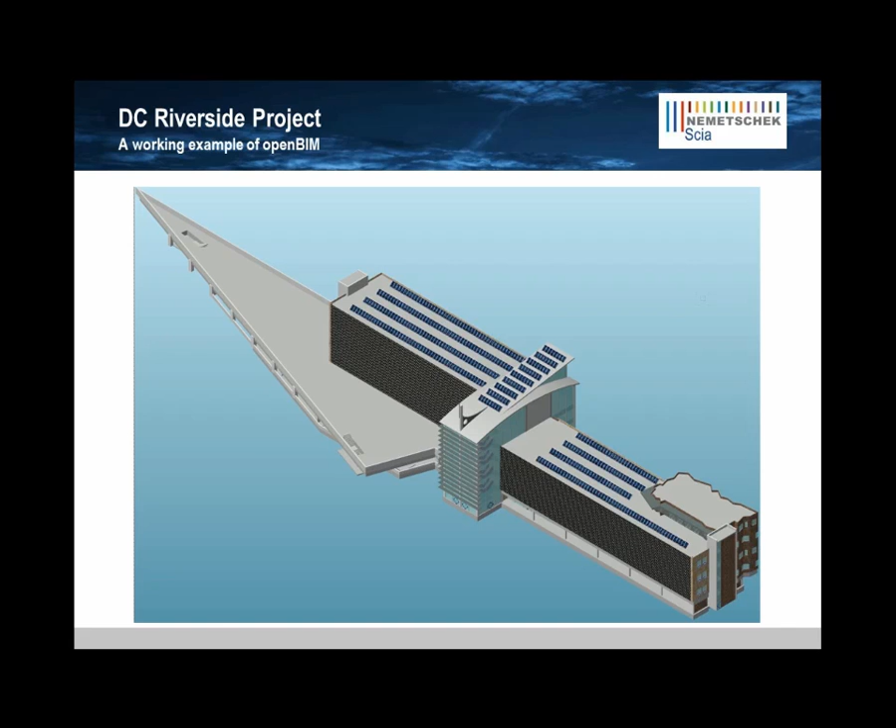As is typical today, the teams in this project all use different BIM authoring tools, i.e., the software that they felt worked best for their part of the design process. To help organize the team, this project used the American Institute of Architects E202-2008 documents and BIM protocol exhibit as a guide to manage the BIM model development and exchange.

Similar BIM protocols are available in other countries, for example, the Statsbygg BIM Guide in Norway and the Senate Properties document in Finland. The benefit of these documents is that they clearly define who's responsible for what at the various stages of the model/project progression.

The AIA BIM documents introduce the concept of model LODs, or levels of development, for each stage in the design process. These stages somewhat overlap the traditional workflows, but instead of 7 or 8 stages with very unique aspects, there are only 5, which focus on the development and the details of the BIM model and the responsibilities of each of the team members.

While the stages appear linear, from general to specific, the BIM Guide really promotes an iterative process where team members are involved early in the design and regularly review and exchange model data. For the purpose of this demonstration, we're going to focus on the LOD 200 and LOD 300 stages of model development.

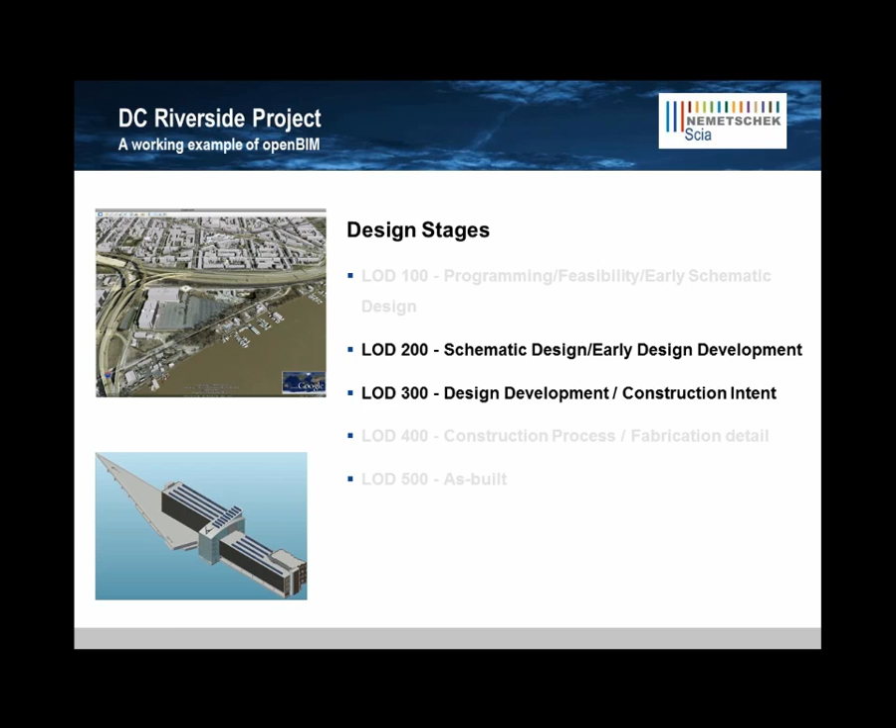This project started with the architect delivering 2 Vectorworks IFC files, an LOD 200 model of the architect's early concept of the architecture, and an LOD 200 model of the architect's early concept of the building structure. Allowing the structural engineer to reference and reuse the architect's model is a huge improvement over today's traditional workflows.

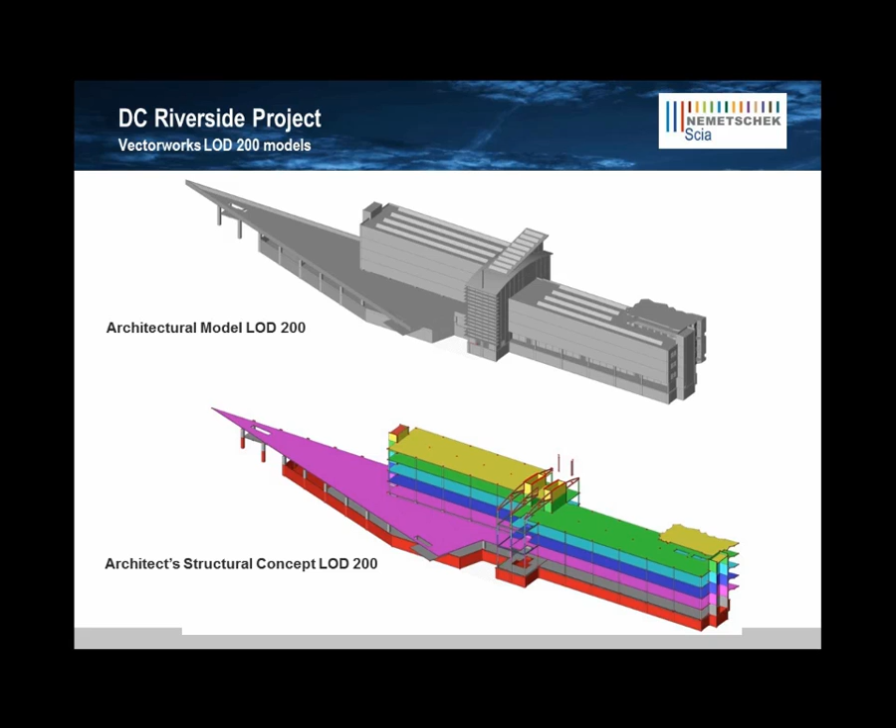Here, you can see the 2 Vectorworks IFC models together in Scia Engineer. Some people ask, why 2 models? Well, having the architect's model as background geometry helps the engineer better understand the architect's intent and reduces the number of RFIs, or requests for information. Having the structural model means that the engineer doesn't have to start from scratch.

Instead of having to import 2D CAD drawings and remodeling the structure as you would in a traditional engineering analysis program, Scia Engineer lets me easily reuse the structural geometry the architect has already created. For example, in this model, floor slabs transfer in as 2D elements and beams and columns as 1D elements. Now, from the architect's model, I can begin to verify and, where necessary, clean up the architect's information.

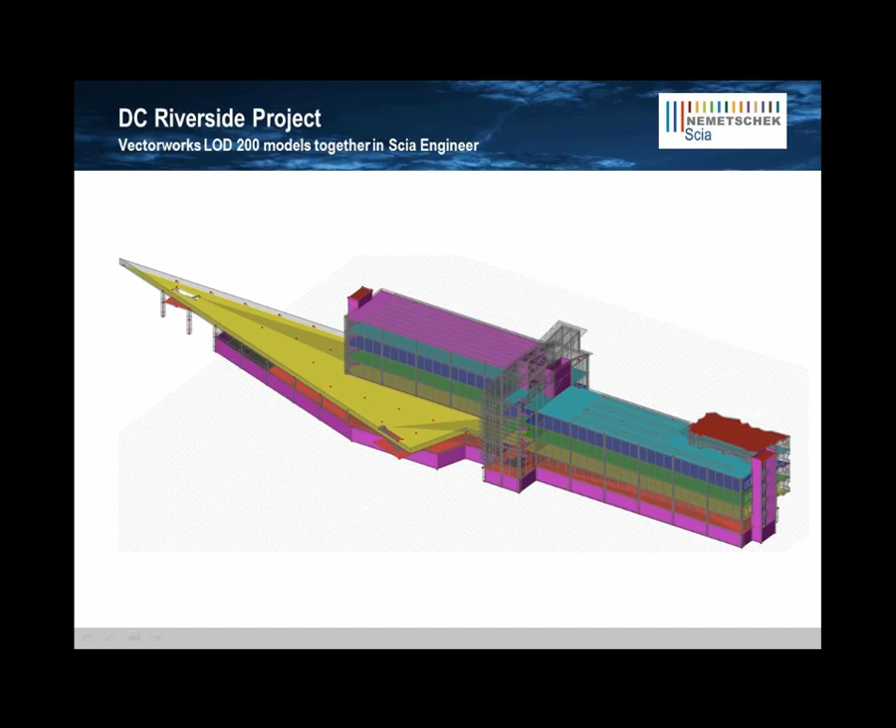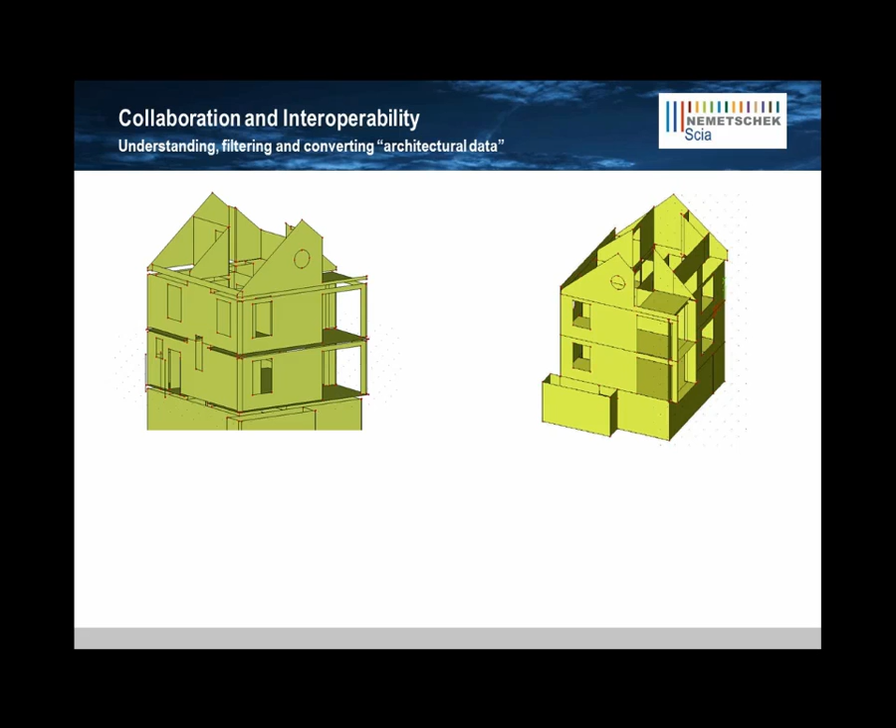This concept of being able to clean up an architect's model is another important technology in Scia Engineer that makes the model exchange between Scia and Vectorworks useful. As you know, architects and engineers think of structures differently. Architects tend to think in volumes and are typically not concerned with modeling the structure as a real coherent structural model that's needed for analysis.

So, how do you go from the architect's model to a proper analytical model? With traditional analysis software, this is either impossible, i.e. I have to remodel the building in my analysis and design software, or the cleanup is very tedious and time-consuming. Scia Engineer provides a suite of tools that make it easy to convert the architect's model into a proper engineering model that's ready for analysis.

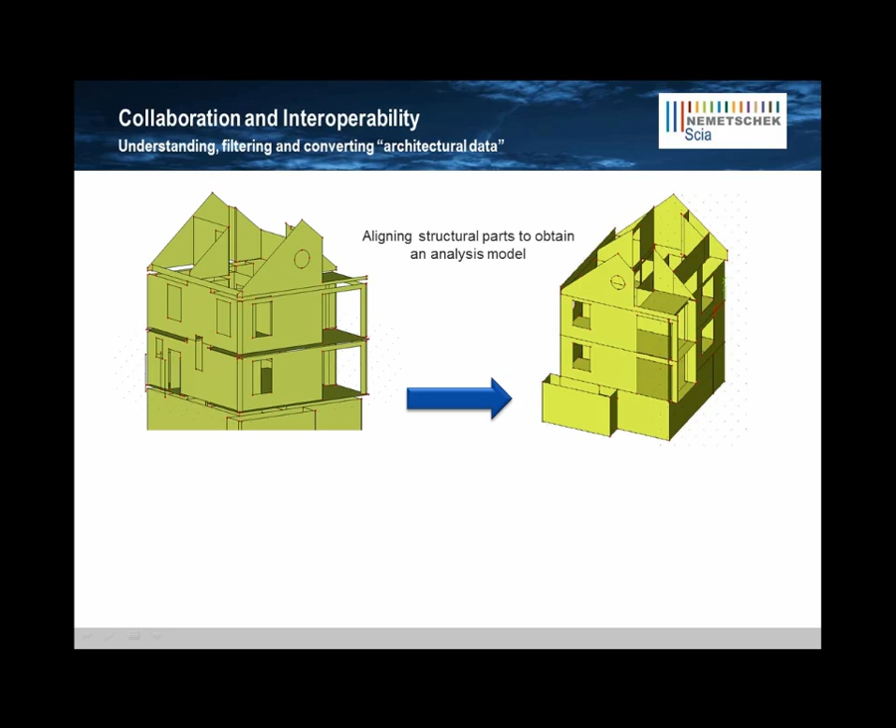Here's a simple example of what I'm talking about. Here, we have a column as it would be designed in Vectorworks Architect. But the engineer needs different information. He needs this schematic representation, the plate, the foundation, the column, the beams, described as bars and nodes. This is classical for an engineer. But how do you go from this to this?

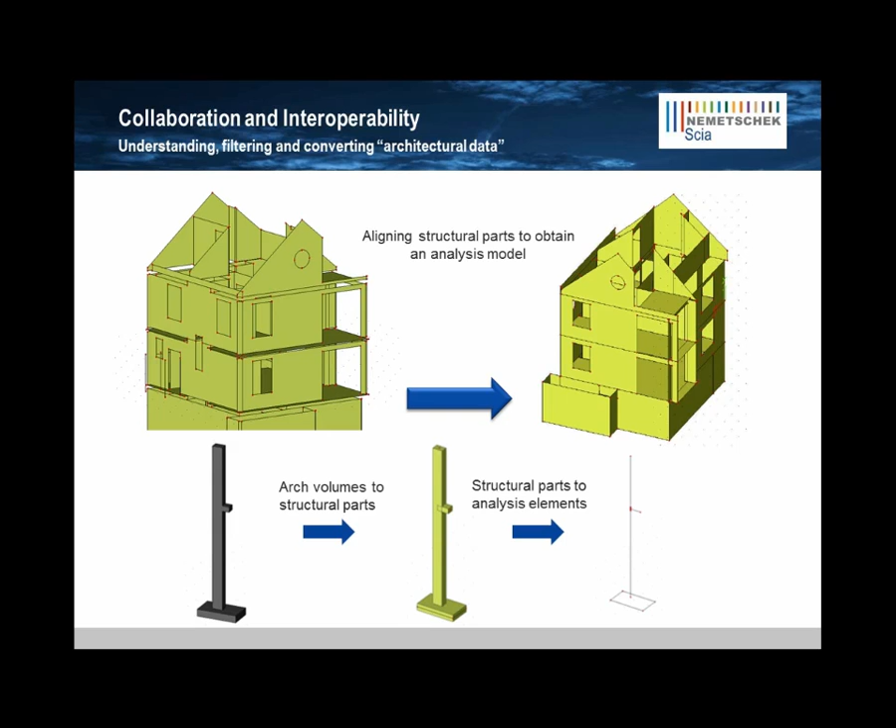So, from the architect's early stage LOD 200 models, the engineer would use rules of thumb and maybe some light analysis to return to the architect an early structural concept model, or what we call the structural LOD 200 model. This model would be returned to the architect for validation before we continue.

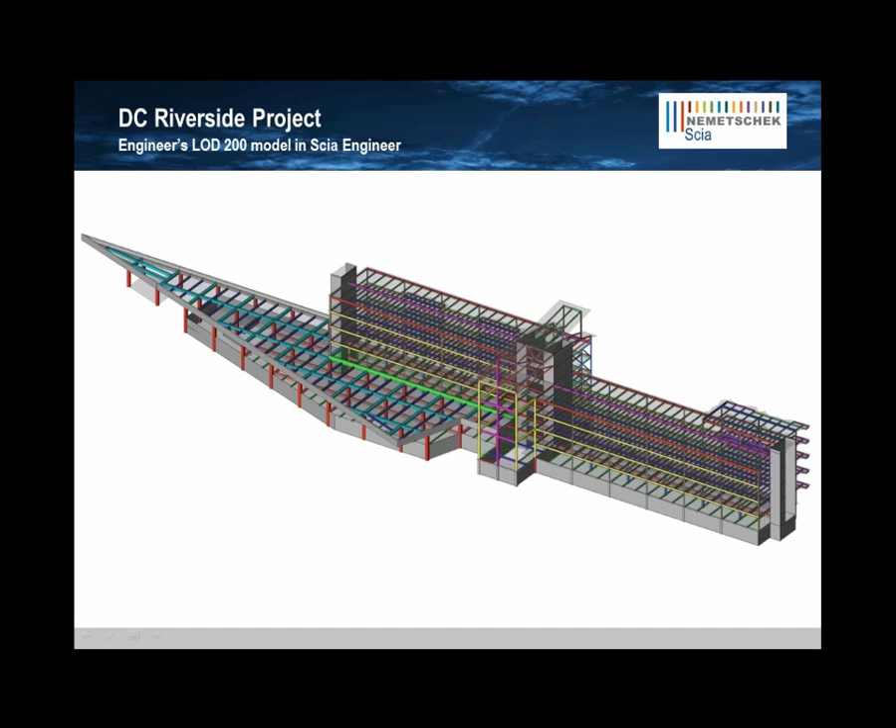In this project, as is typical, the architect, owner, and contractor evaluated the design and decided to make some changes based on cost, constructability, and aesthetics. Here, you can see the more refined Vectorworks Architect LOD 300 model and how it's changed from the LOD 200 model. In this project, the tower roof was simplified to a flat structure, and the east wing penthouse was developed into a full floor to maximize the lettable area.

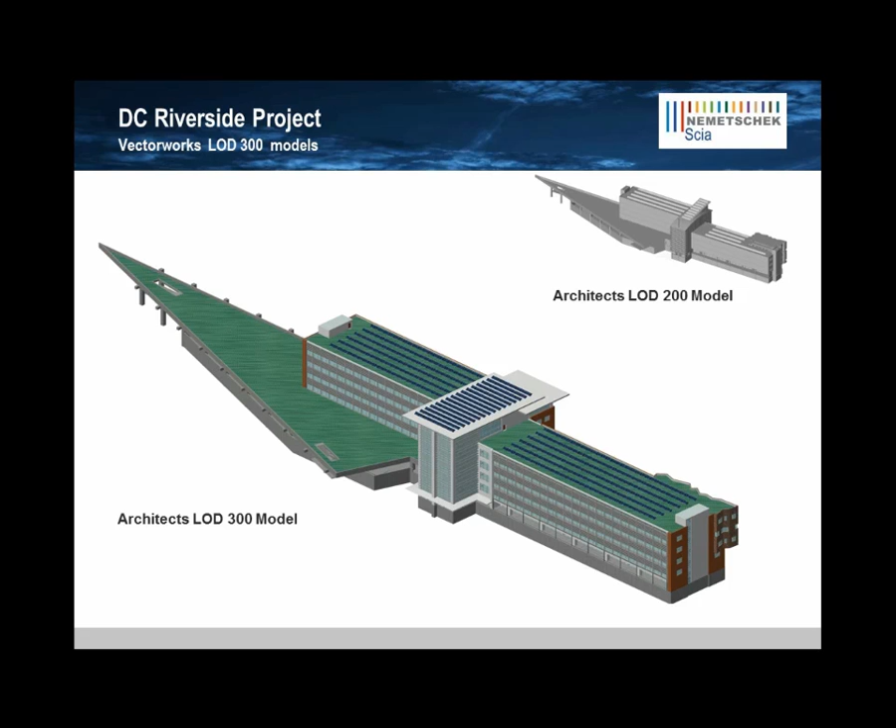So, from the architect's more developed LOD 300 model, we reworked our structural LOD 200 model to incorporate these changes. The result is a more developed LOD 300 model of the structure that's now ready for loading.

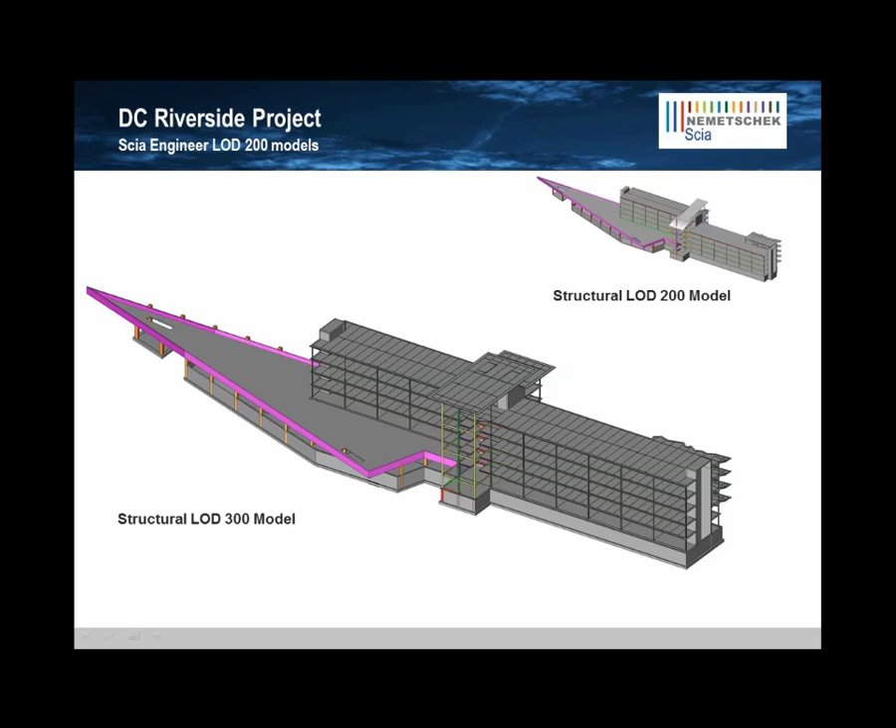Here, you can see the live loads being applied to the floors in SCIA Engineer. Next, we set up the model for wind loads, and we would continue to add loads and load combinations as necessary. Then, with the loads defined, we're ready to move on to analysis and design.

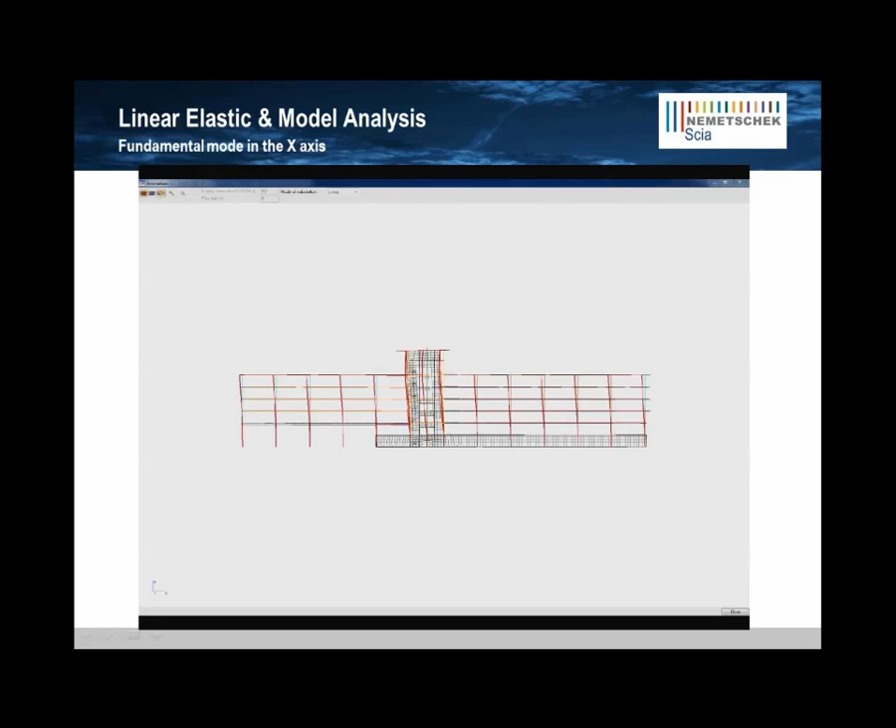Here, we're looking at a fundamental mode in the x-axis. And here, we can visualize the central core deflecting under some seismic excitation.

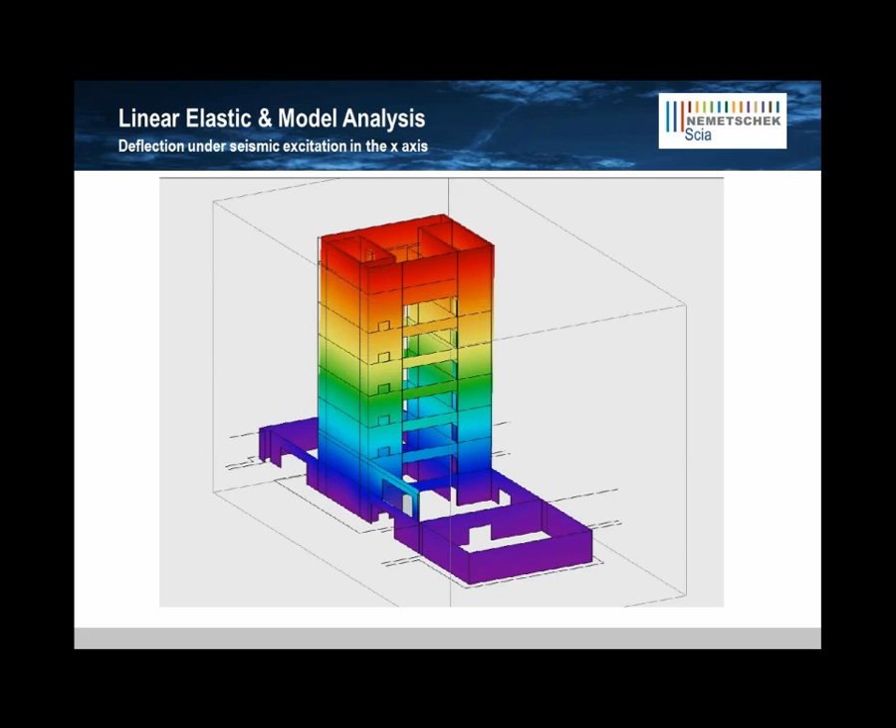The central tower portion of this project required some special attention, as the tower housed the building's mechanical systems and service core, as well as a 6-story open atrium that was an important architectural design element. From the Vectorworks IFC file, we were able to easily derive an accurate analytical model, make refinements, and then pass back to the architect an updated model of the tower structure.

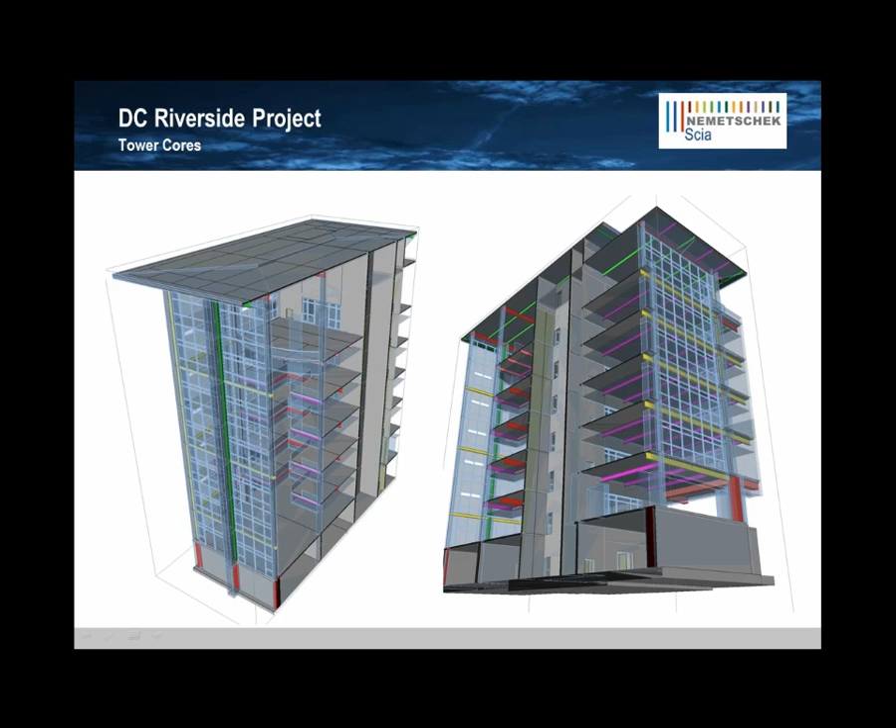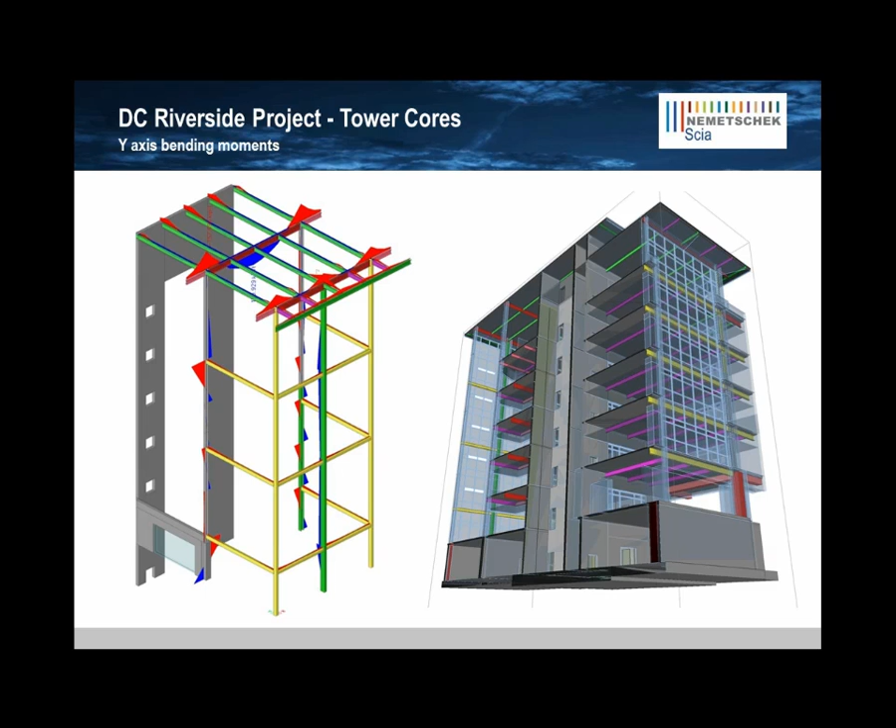Here, you can see the bending moments on the tower atrium steel frame, and we could see the results graphically on the physical model of the structure. This ability to integrate the physical and the structural model in SCIA Engineer means that we can visualize instantly how changes like editing a cross-section, adding bracing, or moving a member will affect the shared structural model. This was important in this project as the tolerances for the mechanical systems were pretty tight.

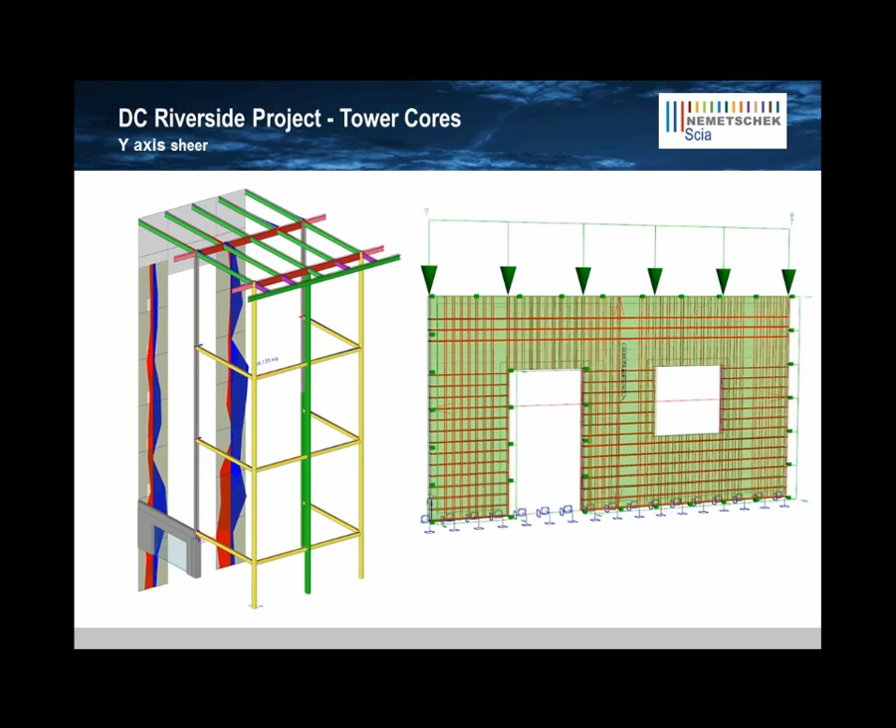Here, you can see the shear on the tower core walls, and using these values, we could optimize the tower core's reinforcement. And because all structures are tied to the ground, it's important to consider the effect design decisions have on the soil structure interface. Here you can see the bearing stresses on the soil. If needed, we could design piles or other foundation supports and then feed that information back to the architect.

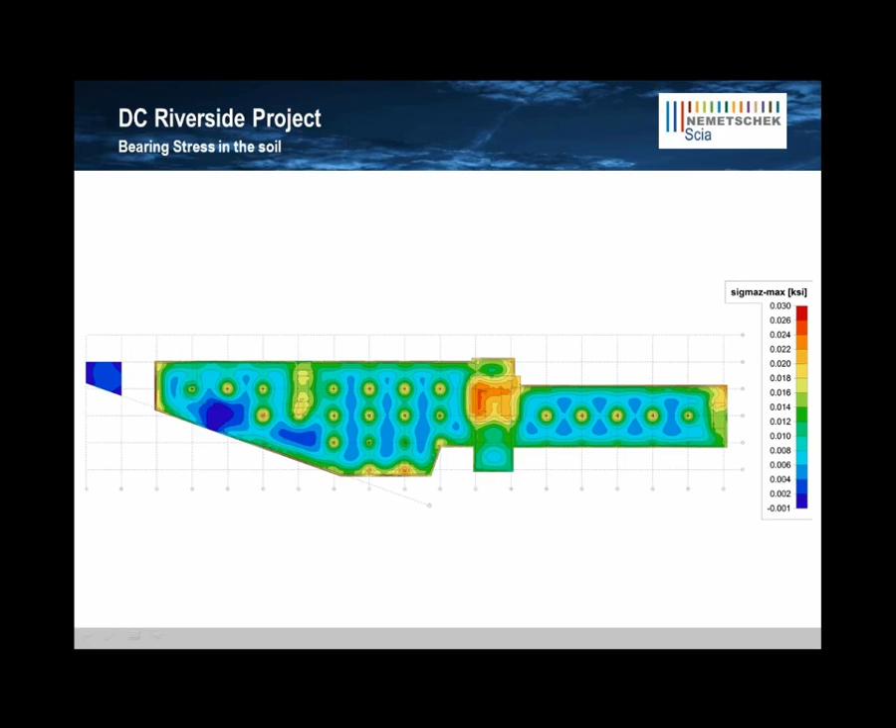Once we're finished with design, we could then begin to document the project. Here you can see the framing plans that were automatically generated from SCIA Engineer's structural model. Also, because we've maintained the Vectorworks Architect model in the background, we can give a much more complete representation of the structural system within its actual context. The Vectorworks model is being displayed gray in these drawings.

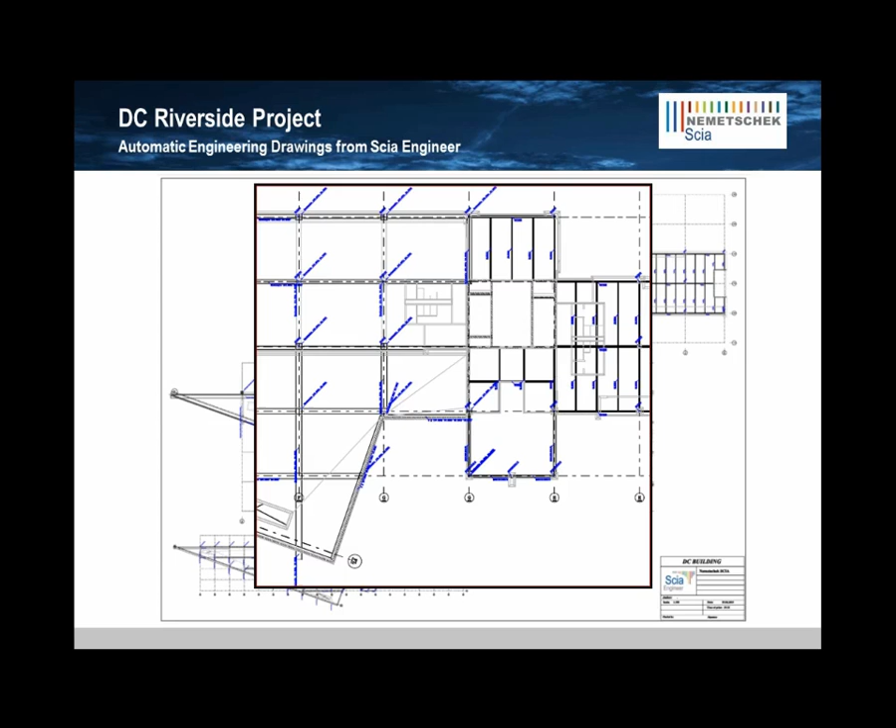And here are some section drawings generated from the SCIA model. Of course, these drawings are linked to the model, so they'll automatically update as the design changes. And these drawings can be exported to Vectorworks Architect as DXF/DWG drawings or shared as PDF files.

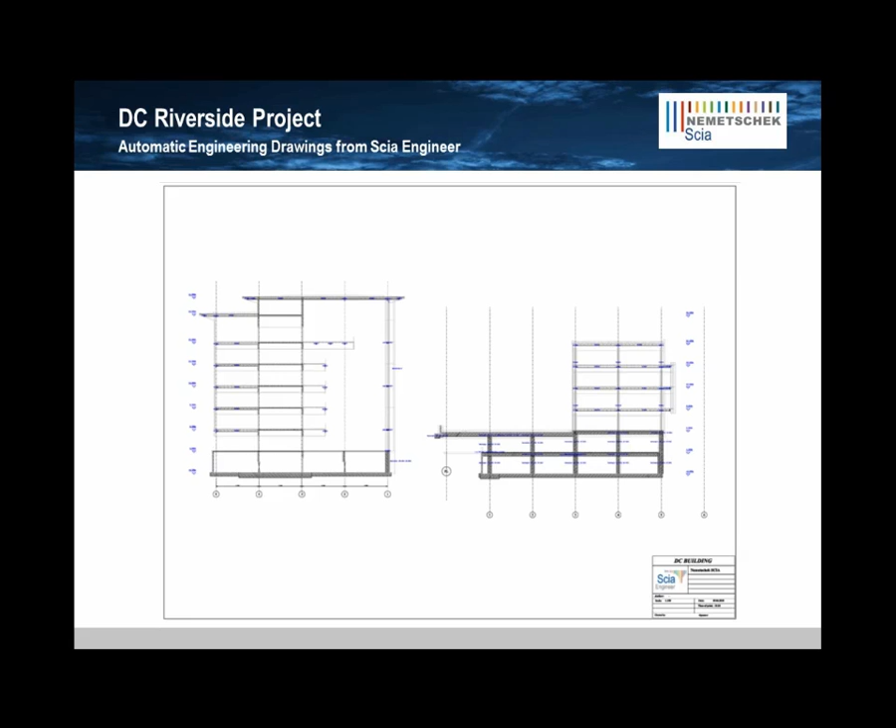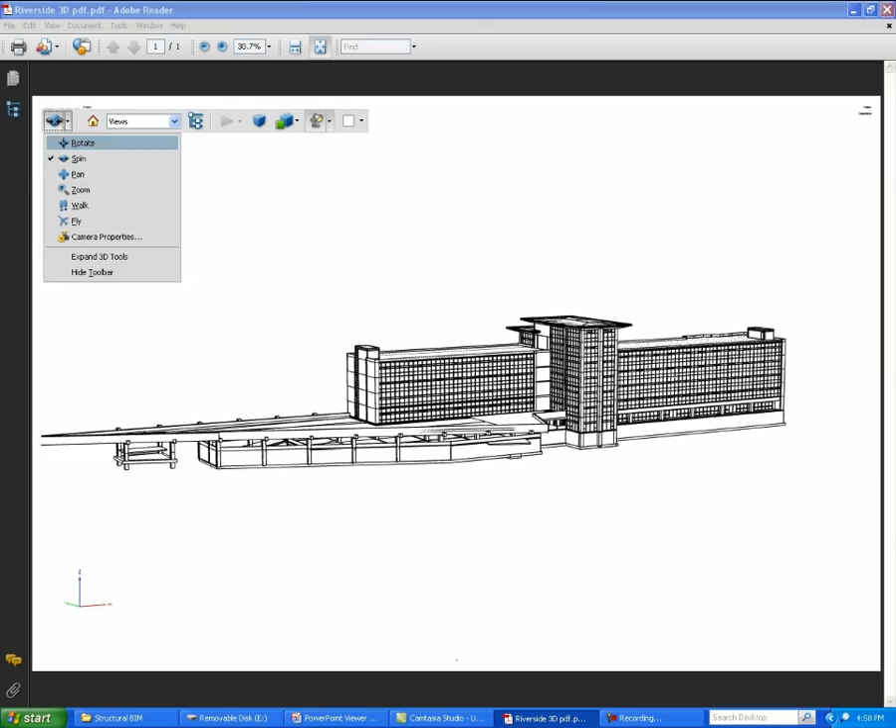Being able to share and merge the architectural and engineering models allows new ways to communicate our design. Here we have a 3D PDF of the DC Riverside project. Using 3D PDF, we can create a 3D presentation that anyone can navigate and examine. Using the navigation tools available in the free version of Adobe Acrobat Reader, a reviewer can zoom in and take a closer look at the models.

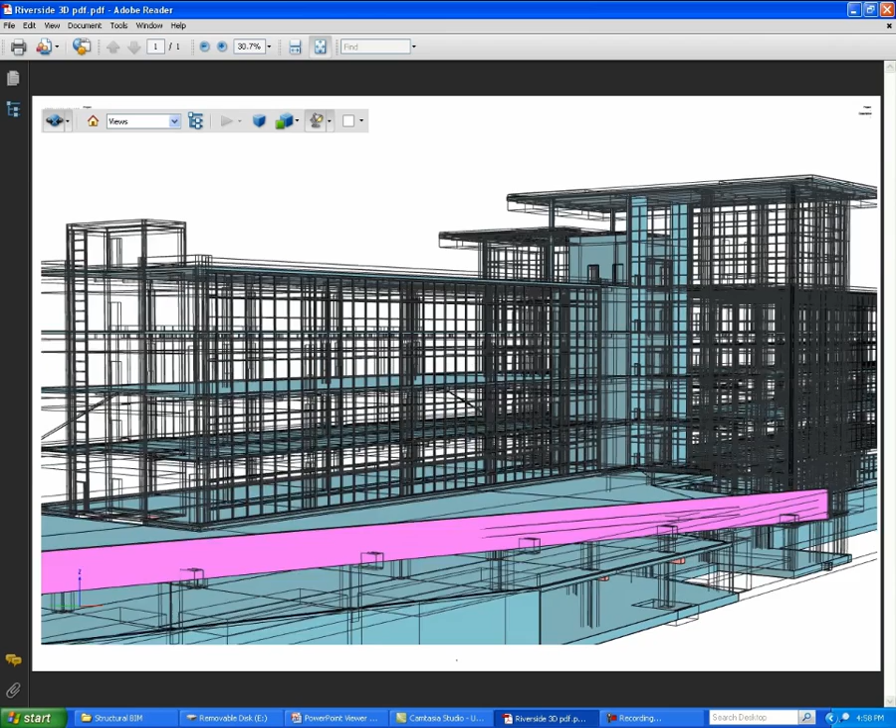They can change their rendering settings and look inside and see the architectural and structural models working together. And they can even fly around or walk through the design to get just the look that they need. Again, this presentation didn't require any special software or even any extra work. It comes as a side benefit of having the models and using open standards like 3D PDF.

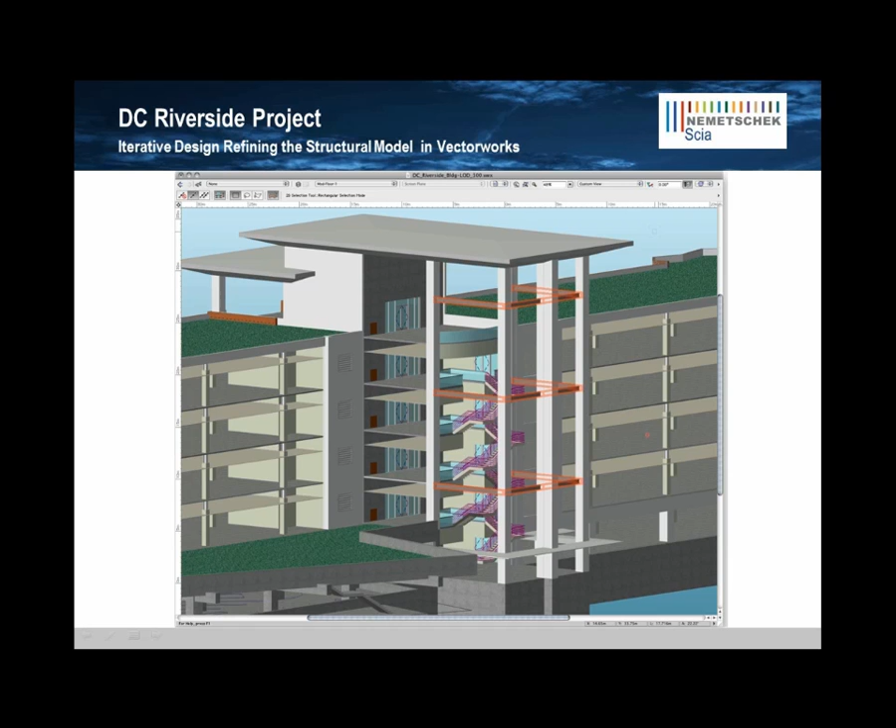In this slide, the architect is notating in the Vectorworks Architect model the location for the bracing. And here you can see the updated model in SCIA Engineer. Next, we reran the analysis, finalized the structural design, and then sent our changes back to the architect for his approval.

And during this process, we were able to track and store changes. In this case, SCIA created a project archive of all the iterations of this design. Using this same iterative workflow, the model was further refined until the design was complete.

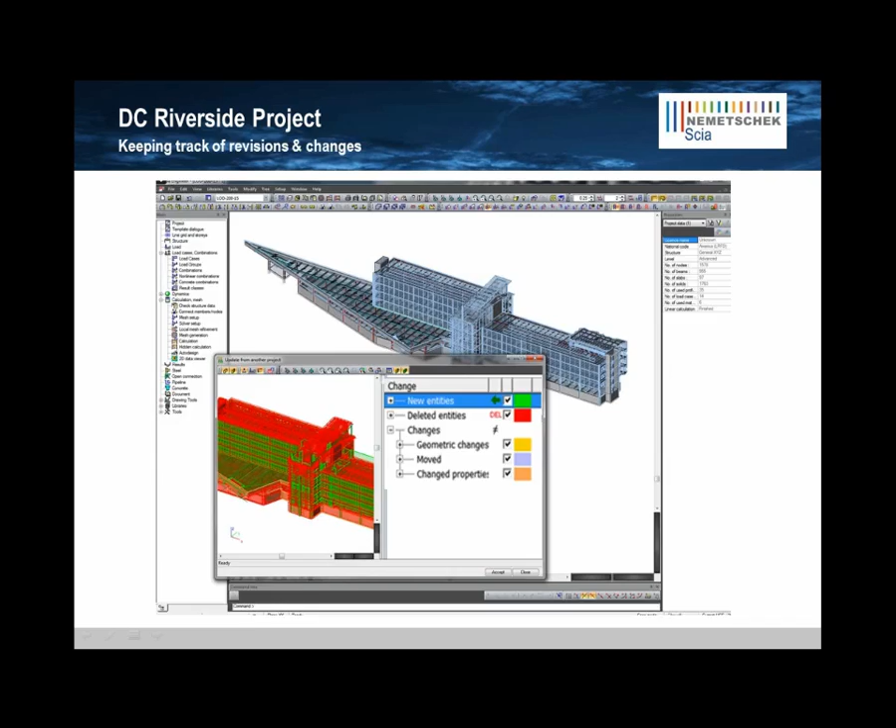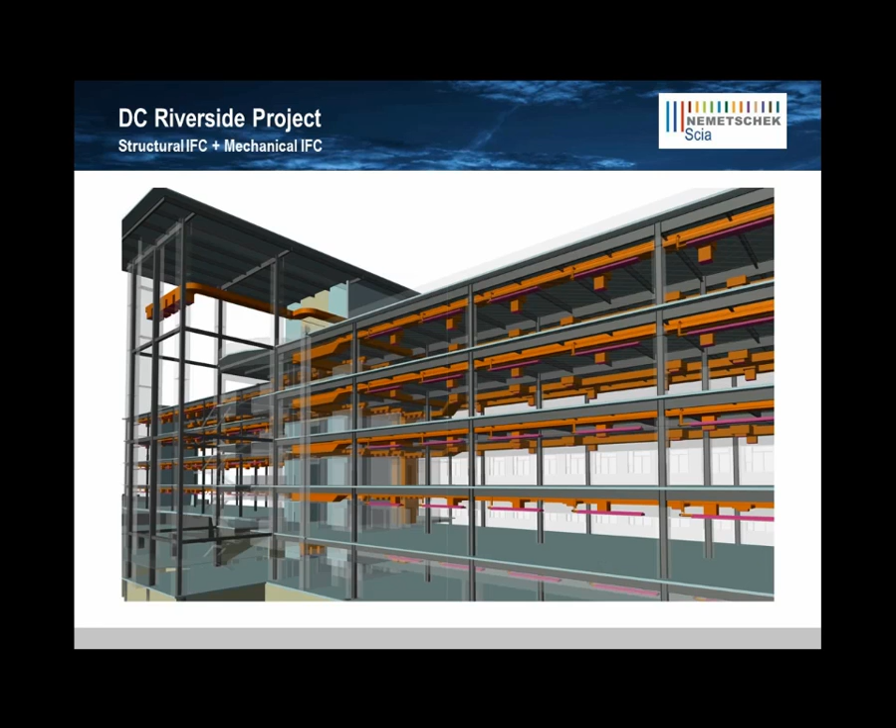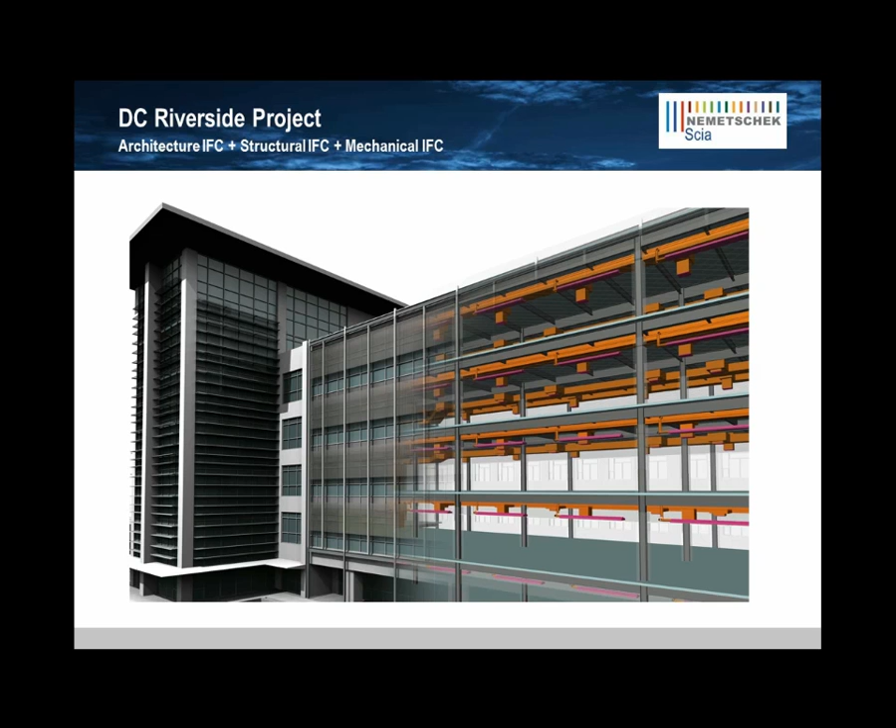Well, that concludes today's presentation. I hope I was able to illustrate some of the benefits that OpenBIM offers, and specifically how using IFC can create a more integrated architecture engineering workflow for Vectorworks and SCIA Engineer users.